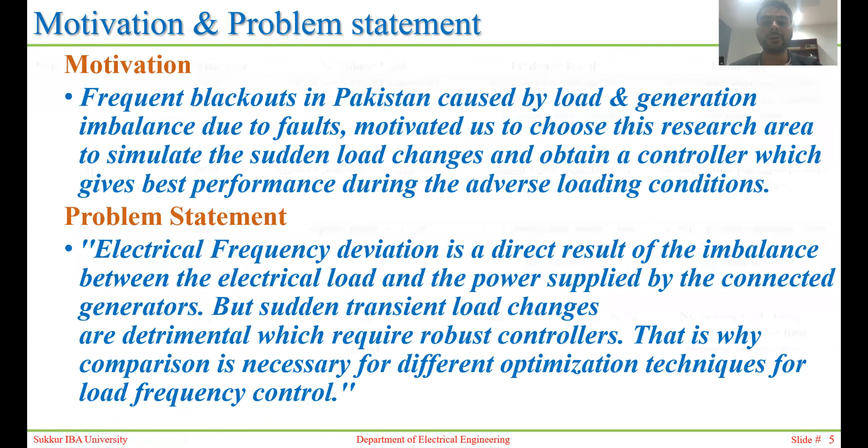So we did the following literature review and the references, and the different authors had used different controllers, which is fuzzy logic PD-PI controller, MPC, and adaptive fuzzy logic PI controllers, and the multi-control adaptive fractional order based PIDs.

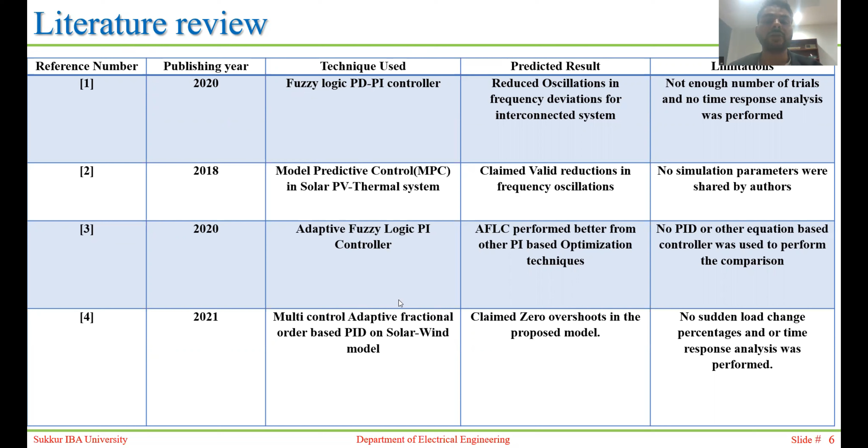So the objectives for our project were to perform the mathematical and simulation modeling of single area and multi-area power system, deduce different comparison techniques for evaluation of best algorithms for governor control and tie line exchange control in the LFC scheme.

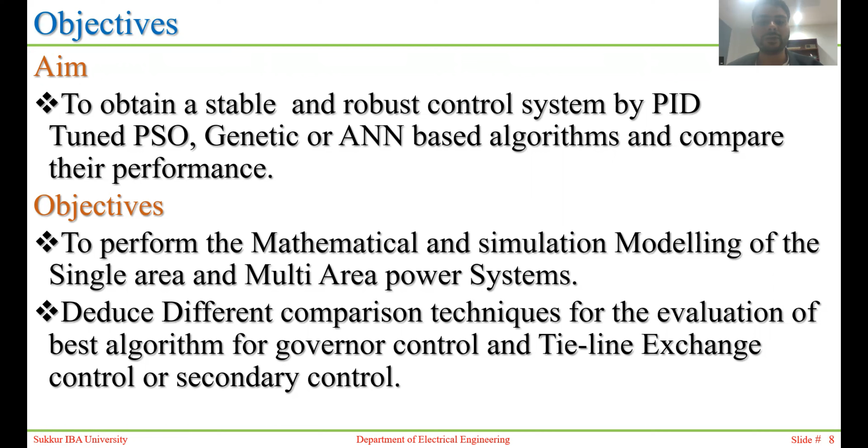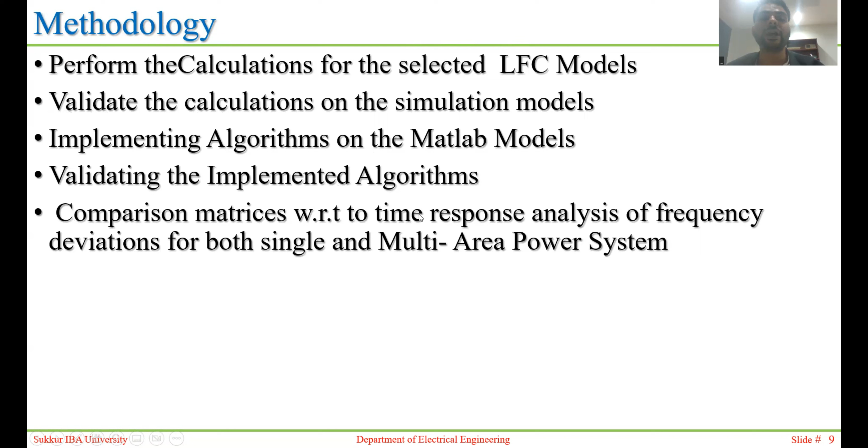So in the methodology, we performed the calculations for the selected LFC models. We validated the calculations on the simulation models, implemented the algorithms on the MATLAB models, validated the implemented algorithms, and we did the comparison matrices with respect to time response analysis of frequency deviations for both single and multi-area power system.

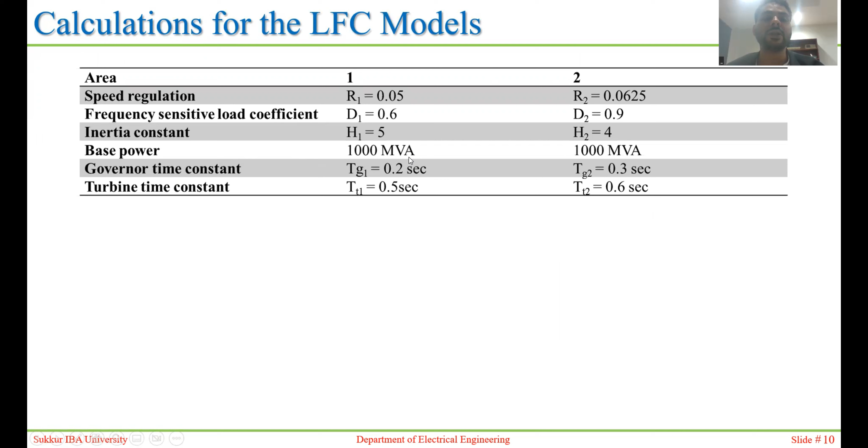And we did the following calculations and chose the time constants and the base MVA for single area and multi-area, which is 1000 MVA, and chose the following inertia constants and the speed regulation constants. So for the single area, this is the single line diagram, and two area, this is the single line diagram.

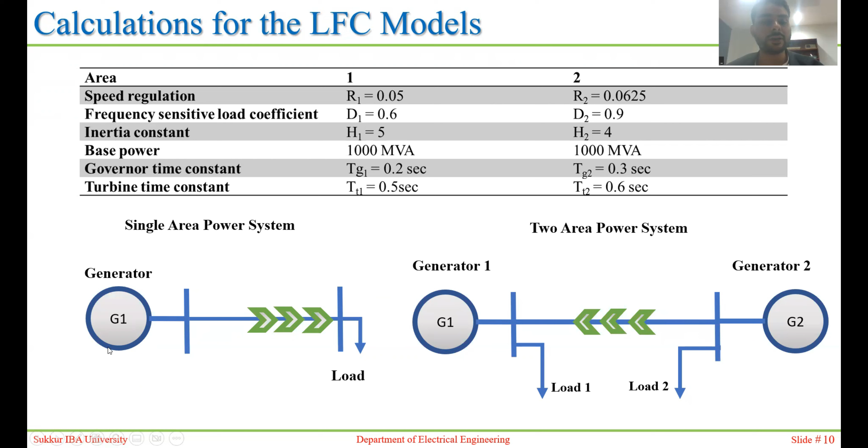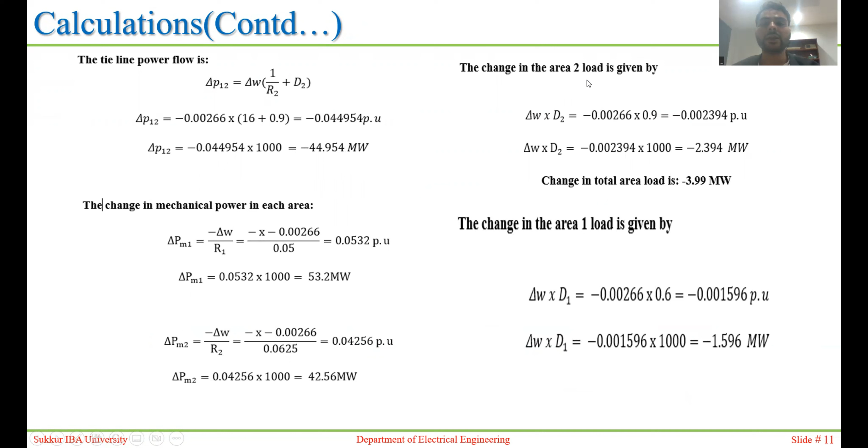So from area 2 to area 1, there is power flow, and in the single area, the generated power goes directly to the load. So these were the calculations that we had performed and calculated the mechanical power changes, and then the tie line power flow, and the change in the area 2 load and change in the area 1 load, and per unit changes in the load and the steady state frequency deviation.

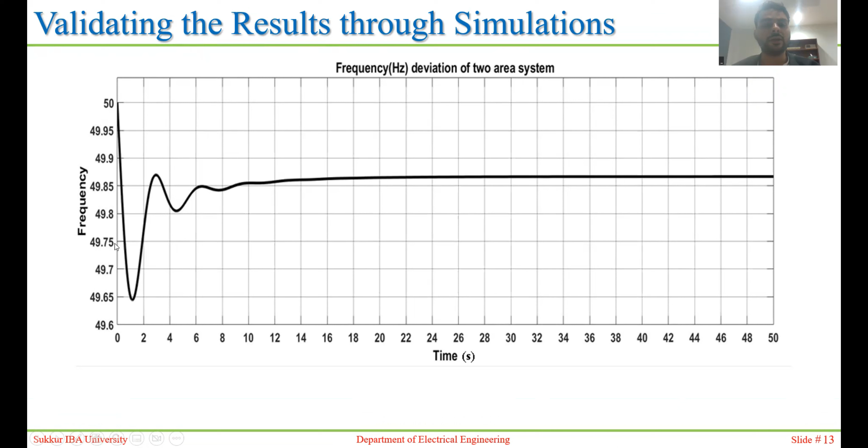So we validated the results on the simulations of the frequency in the two area system and had confirmed the calculations of the model, and then the tie line power, and then these mechanical power calculations.

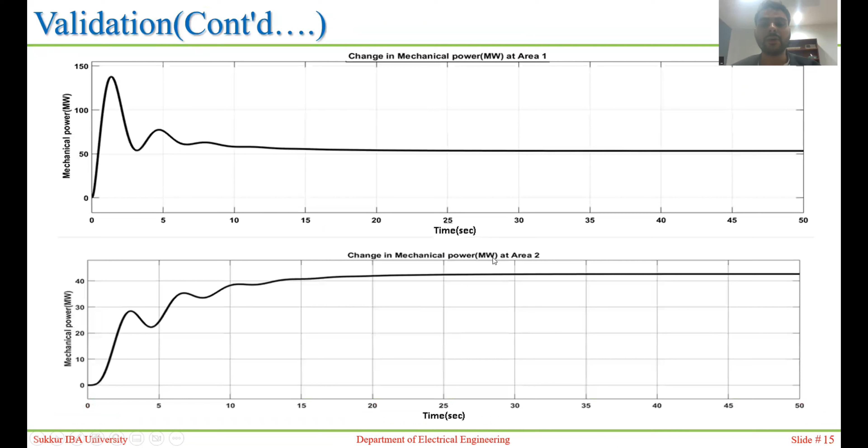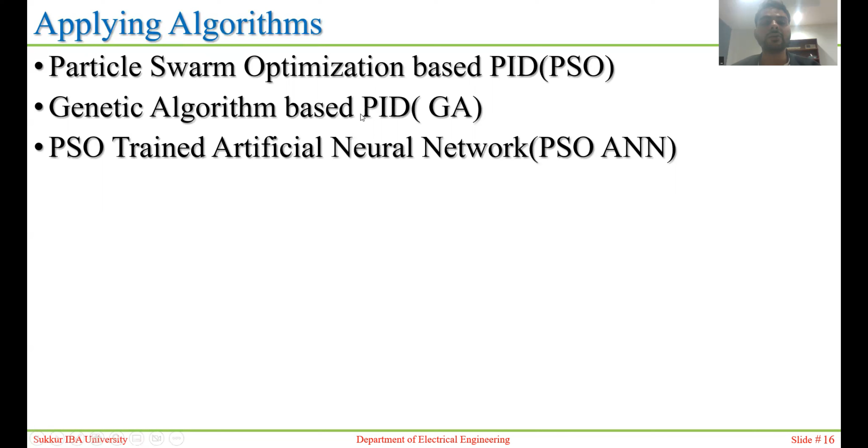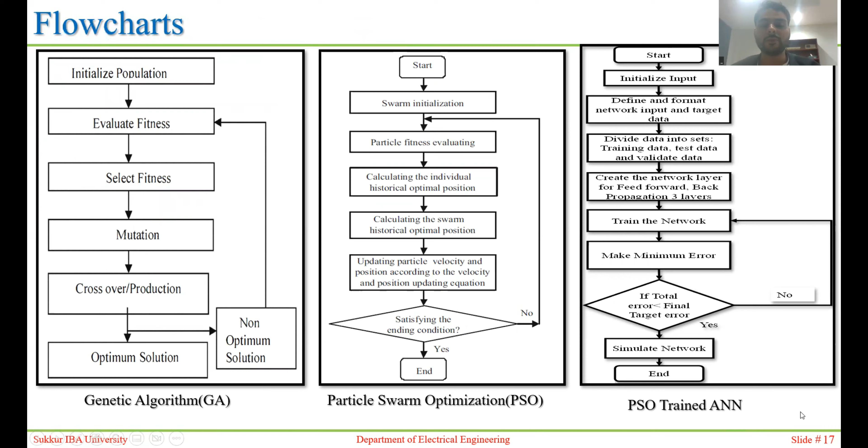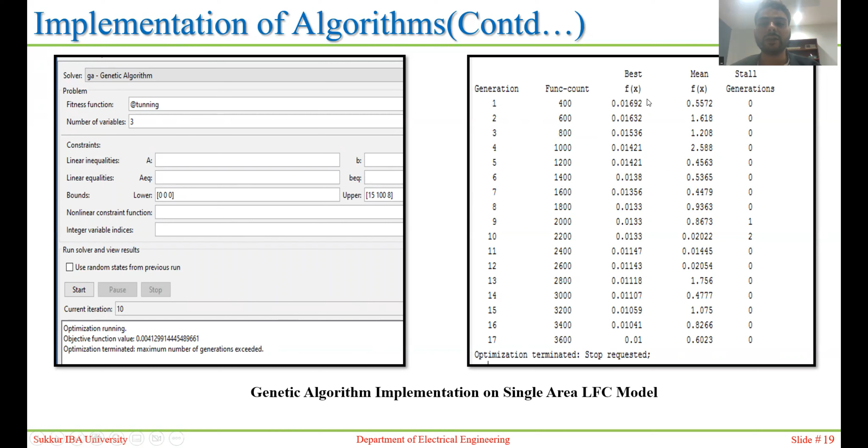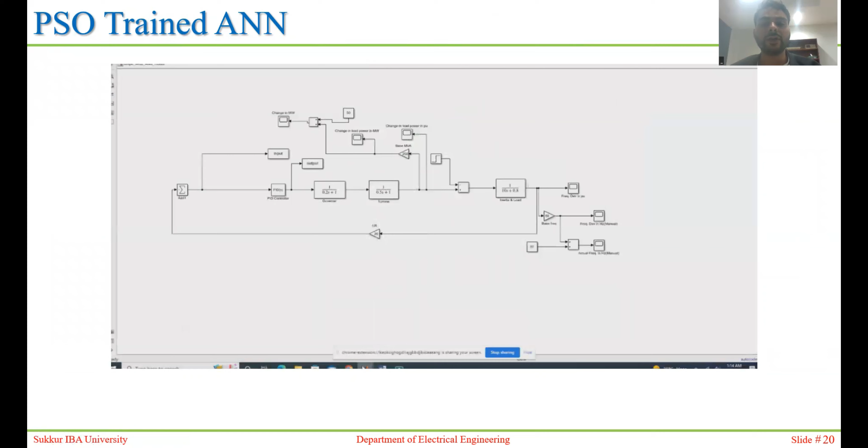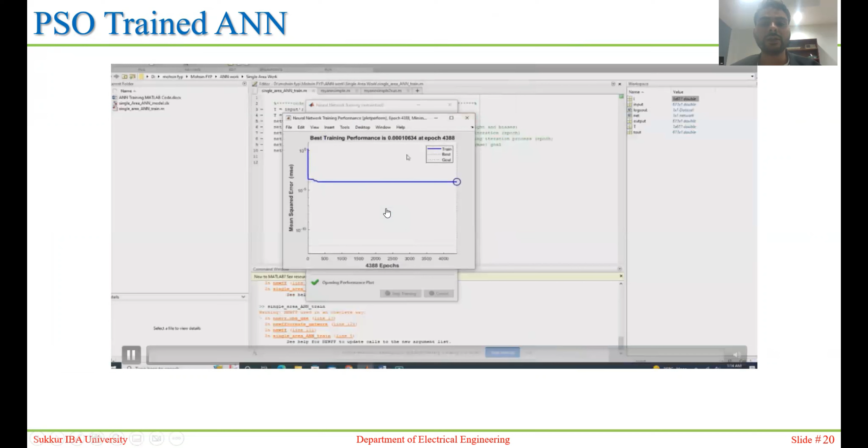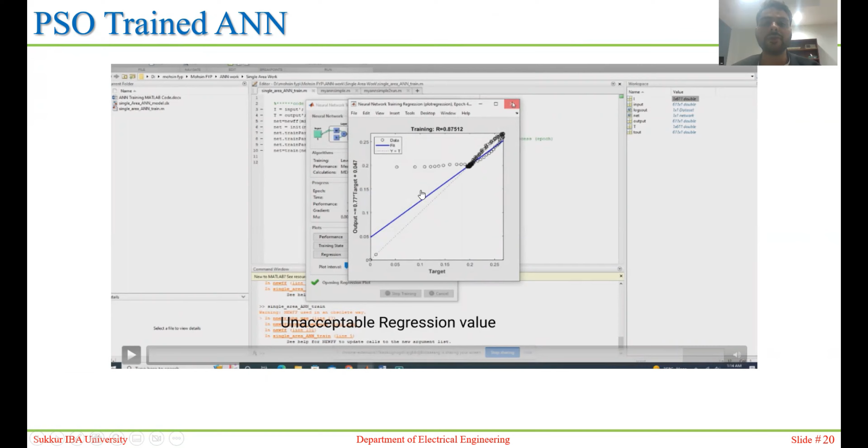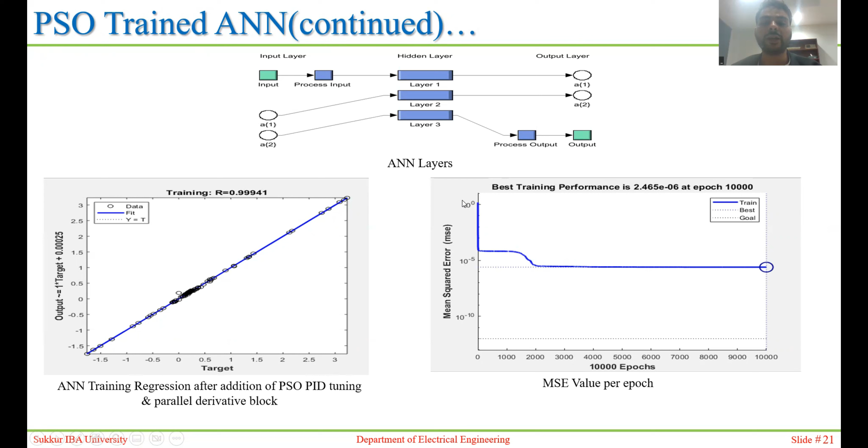So according to our proposal, after addition of PSO-PID based single area power system, the ANN training went from 0.87 to 0.99941. And then the following mean square error reduction was also seen from 10 to the power 0 to 10 to the power minus 5.

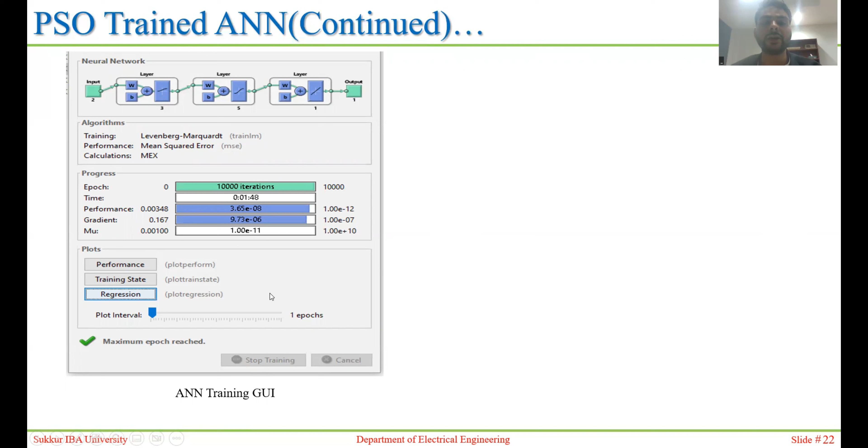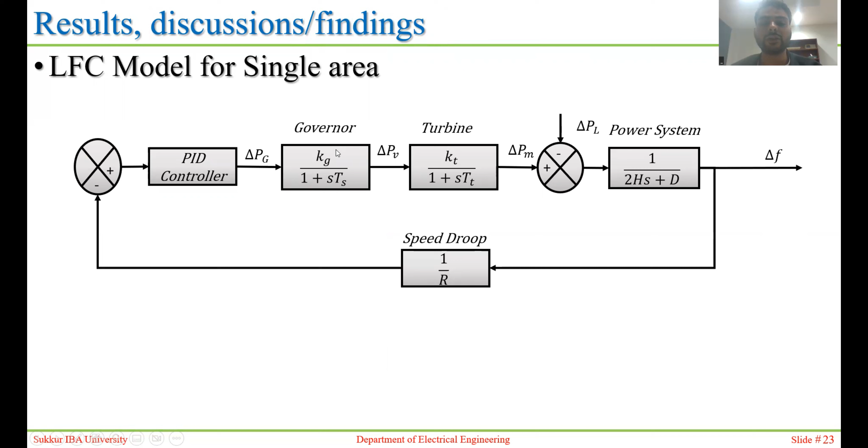So this is the ANN training GUI provided in the MATLAB tool, and this is the single area power system model. Basically this is a diagram which shows the constants and then the flow of the single area LFC scheme.

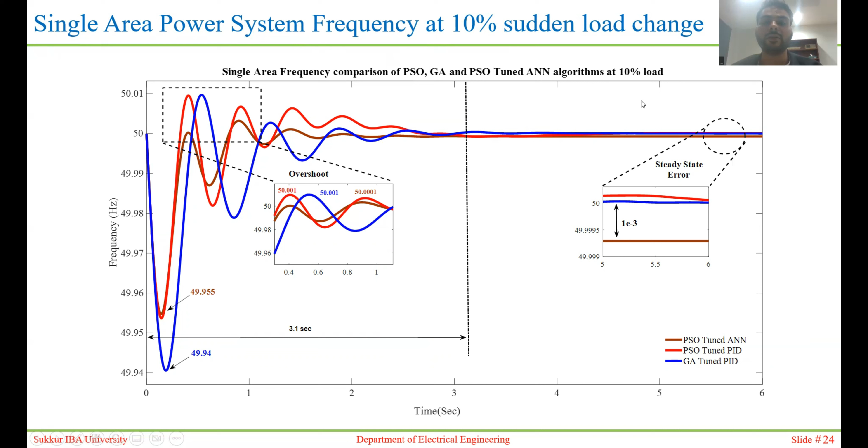So we obtained the following frequency graphs, and we saw the power system frequency deviations at different transient load changes for PSO, genetic and PSO trained ANN performance in the form of time response analysis. So we obtained them for 10%, 20% to 30% for single area power system.

So after these time response graphs, we summarized our results in the comparison matrix, in which we had summarized the values of peak time, delay time, and the undershoots and overshoots. And as you can see, the PSO ANN has reduced the frequency oscillations very well compared to genetic algorithm and PSO based PIDs.

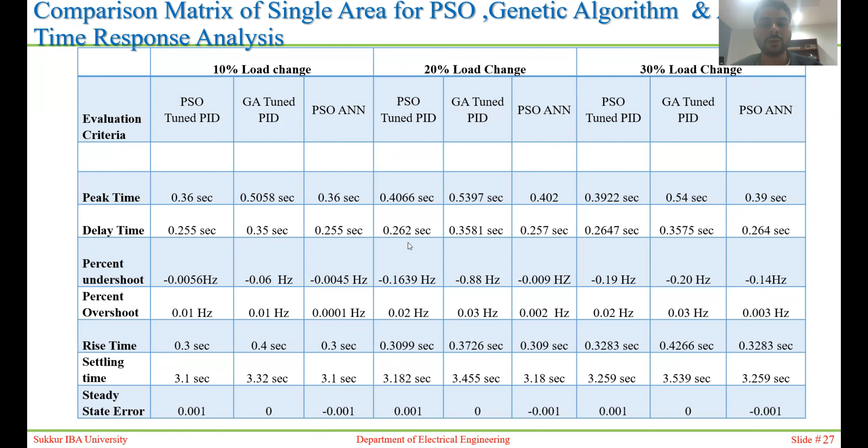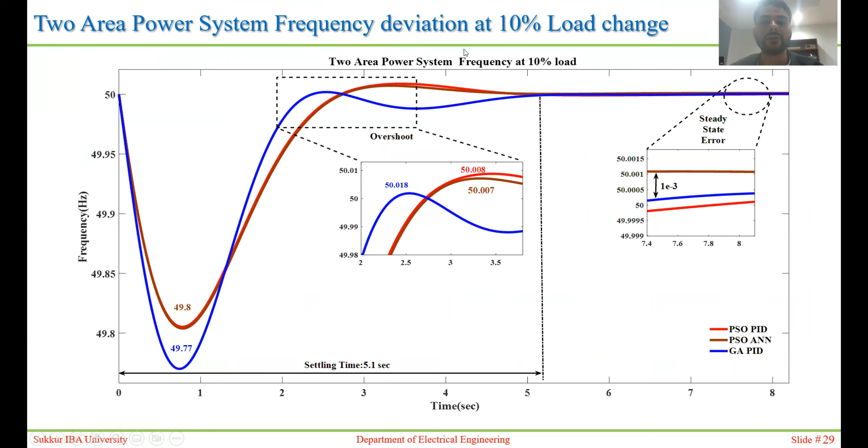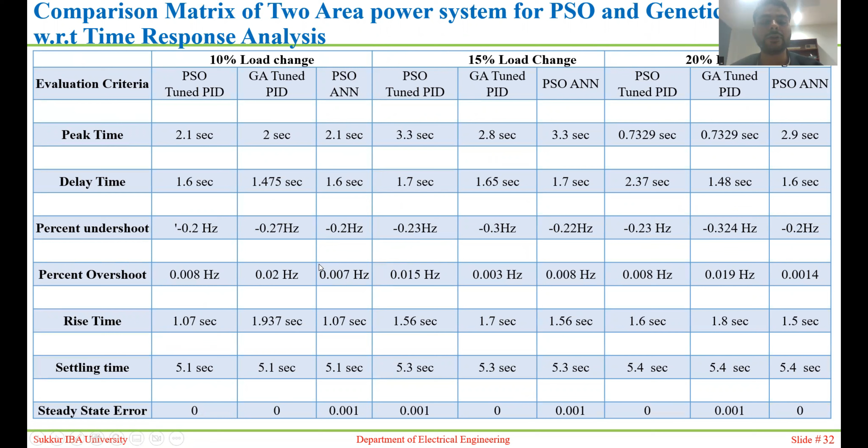We also did the following calculations in two area power system model. In the two area power system frequency deviation, we saw the frequency deviation graphs at transient load changes for 10%, 15% and 20% respectively, and then summarized their results in the comparison matrix, similar to the single area power system with respect to time response analysis. As you can see, also in this case, PSO based ANN was also able to reduce the frequency deviations.

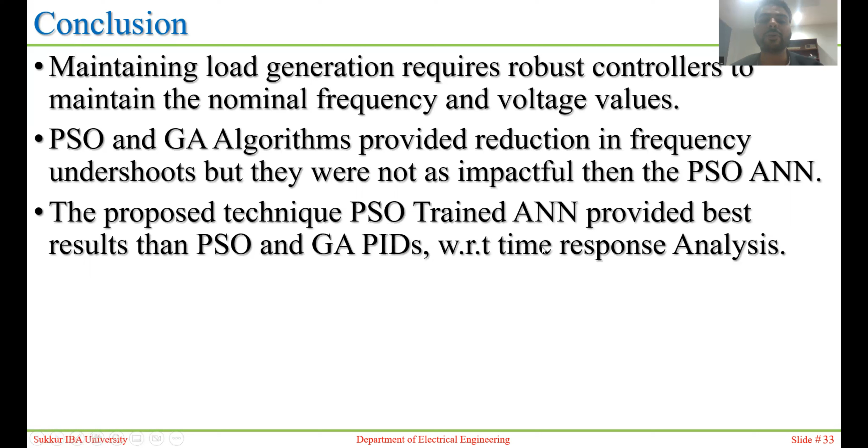So, to conclude our work, we would say that maintaining load generation requires robust controllers to maintain the nominal frequency and voltage values. So, PSO and genetic algorithms provided a reduction in frequency undershoots, but they were not as impactful as the PSO ANN, because our proposed technique provided better results than the PSO and genetic PIDs with respect to time response analysis, as evident in the comparison metrics.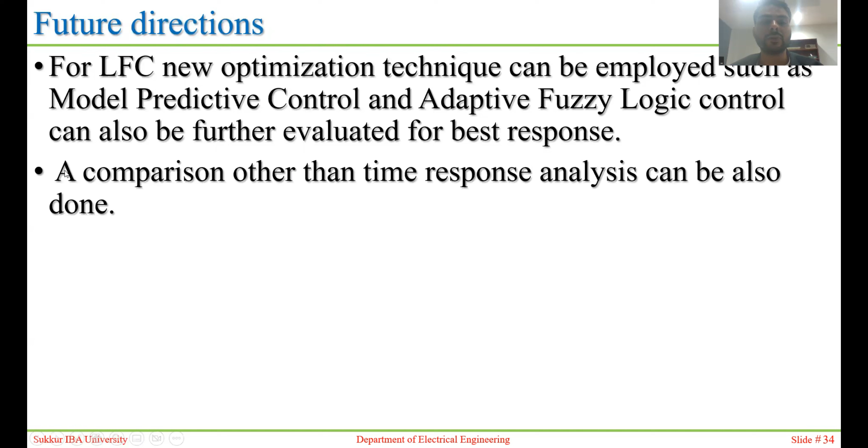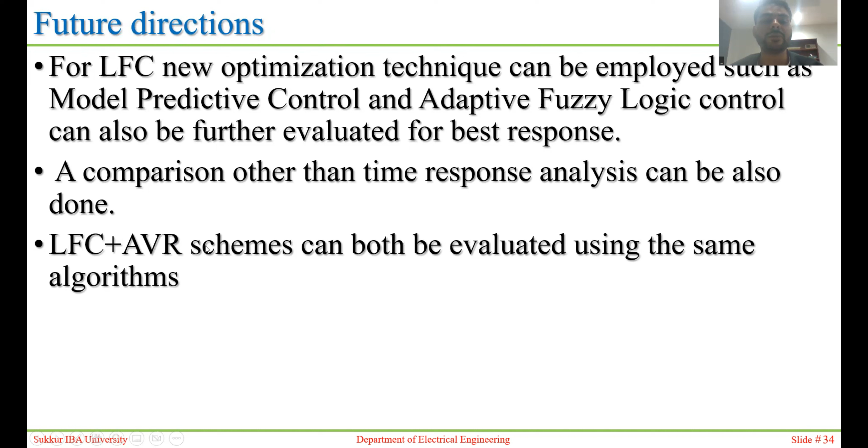For future directions, in LFC schemes, new optimization techniques can be employed, such as model predictive control and adaptive fuzzy logic control, for evaluating further comparison. So other comparison techniques can also be employed, and LFC plus AVR, which is automatic voltage regulation schemes, can both be used simultaneously to evaluate the same algorithms.